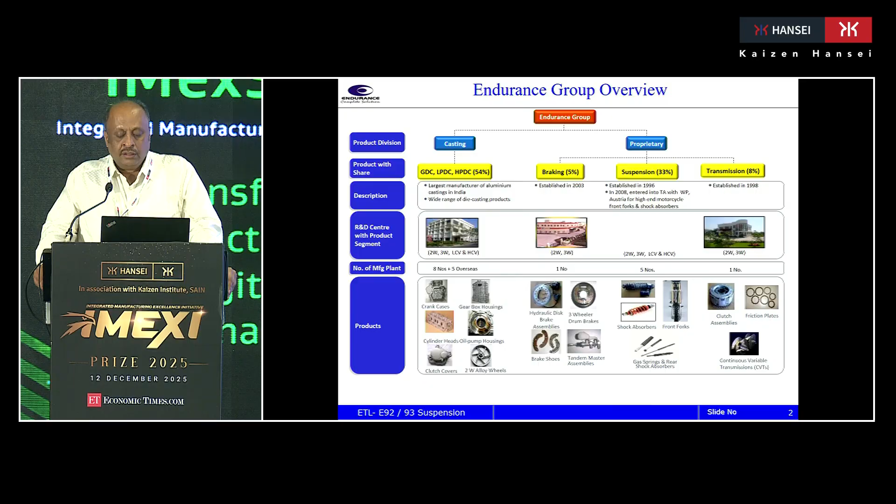Regarding our plant locations, we are in around 34 locations. In India, we have 21 manufacturing locations, 3 in Germany and 9 in Italy. Recently, we started one unit in Tunisia also.

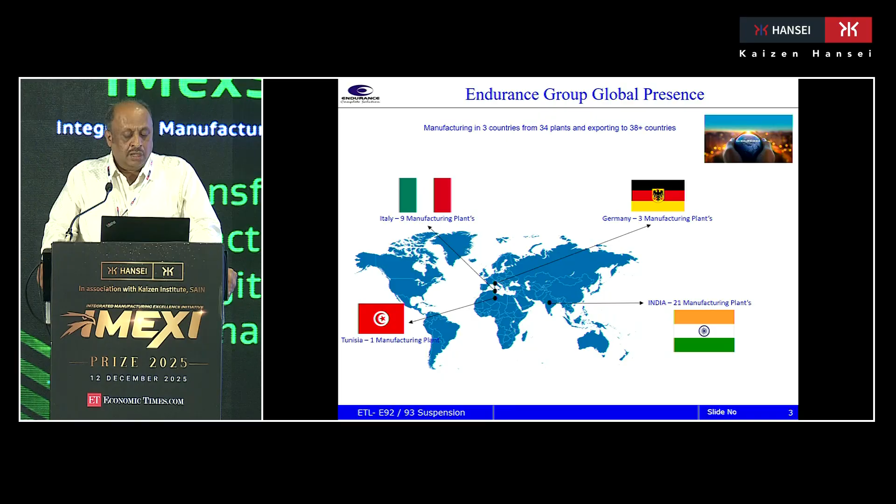Specifically, we are talking about one suspension plant. We will be presenting one case study of air suspension, a new technology in two-wheeler suspension. It is a product which was developed for the KTM 690 vehicle. Air suspension is normally used in four-wheelers, but for the first time, jointly with KTM, we started this air suspension

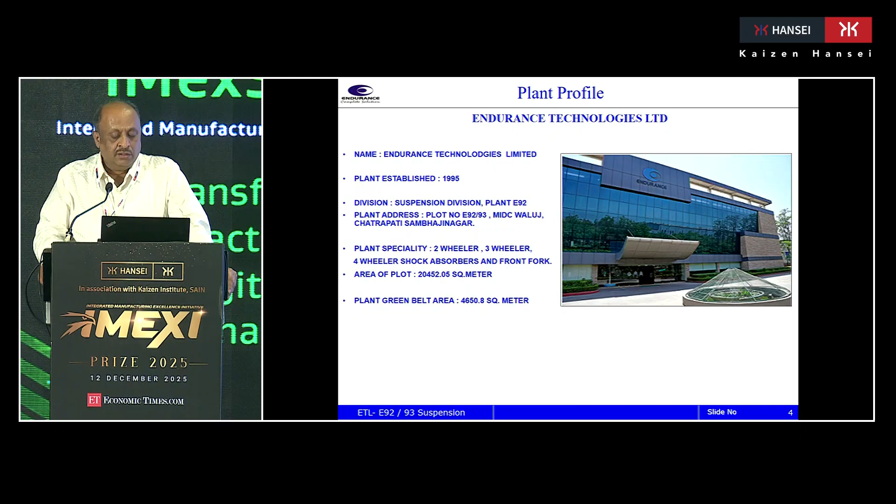We are talking about a suspension plant which was established in 1995. It is in the E92 plant location in the Waluj, Chatrapati Sambhajinagar MIDC. Here we manufacture two-, three- and four-wheeler suspension, shock absorbers and inverted front forks. It is a technological product. And we have a green belt area of around 4650.

If we talk about the Endurance values, our first value is customer centricity, because we believe if customer centricity is there, definitely we can have all the growth. Our second value is integrity, which is part of our value system. Transparency is a very important part of our system. Then teamwork, because without teamwork we cannot achieve anything. Then innovation, because through innovation we want to become the number one supplier for the OEMs.

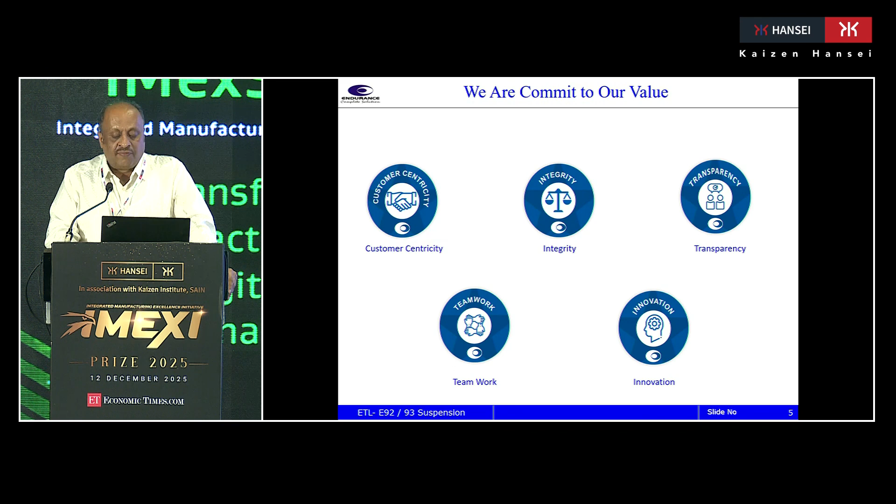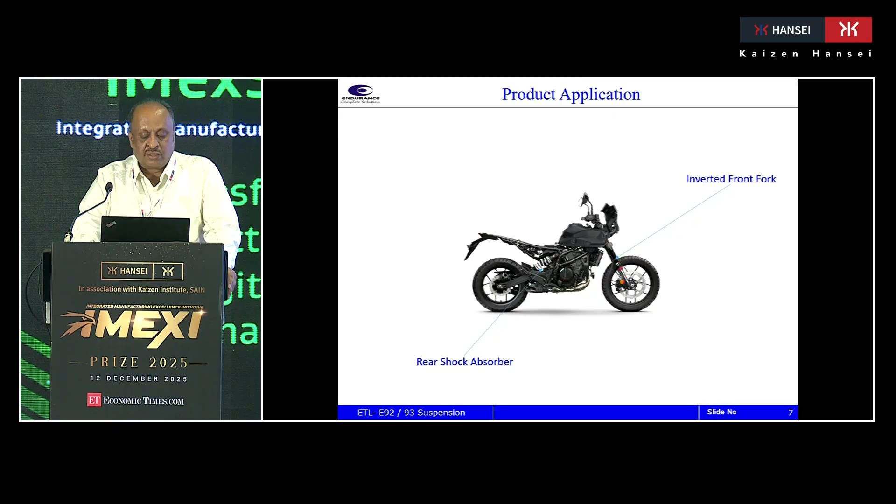Here you see the two products. This is the inverted front fork. Normally front fork means the front suspension. But compared to regular suspension, the design is different. Here the bottom case is on the upper side, so it is called an inverted front fork. And the rear suspension, we manufacture here the rear suspension for high cc vehicles.

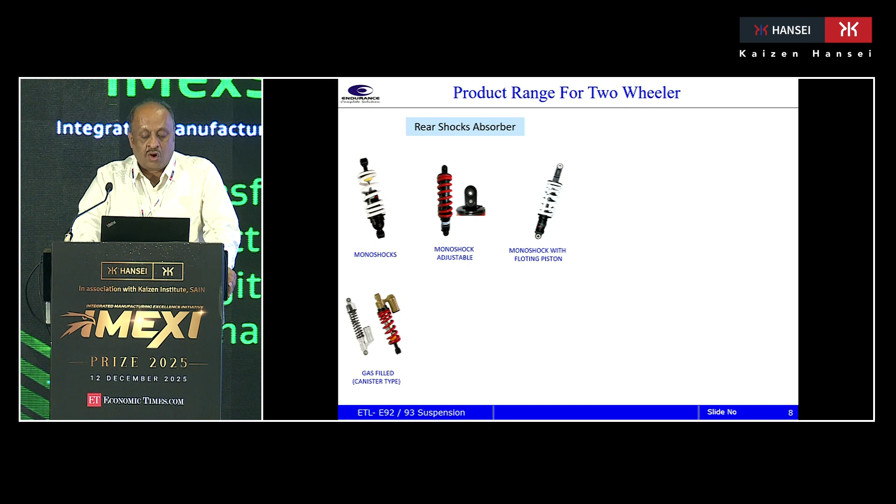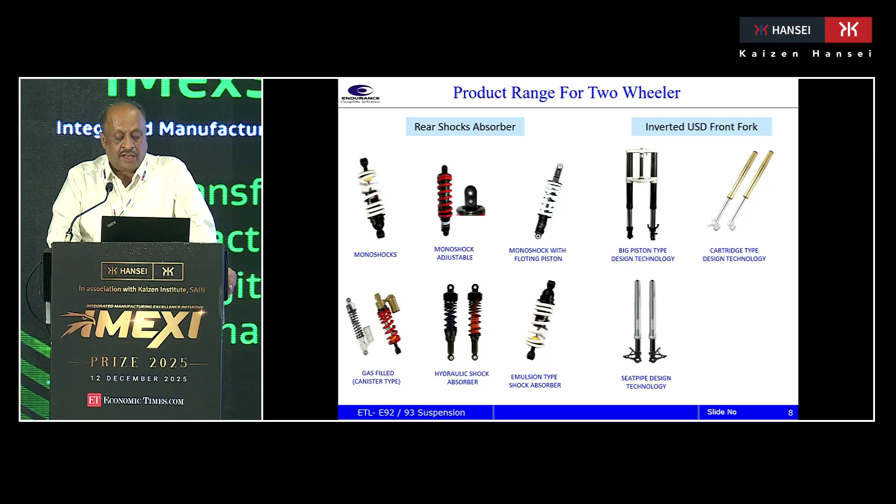You can see the product range. We are manufacturing different types of rear shock absorbers like monoshock and hydraulics. There are around 8 to 10 varieties, and the inverted USD front fork. We are the largest player in India in this inverted fork, and we are supplying to all the OEMs. There are 2-3 types of design: one is a big piston, another is a cartridge type design. These are the basic types.

Now, our motive is related to a new product and manufacturing excellence. When we started thinking of this new product, we thought we should put some manufacturing excellence ideas into it, because it is an innovation, made for the first time. Using manufacturing excellence ideas, we wanted to develop this product and start. This product has already started. We have supplied around 15,000 forks to KTM with zero defects, and it is running successfully.

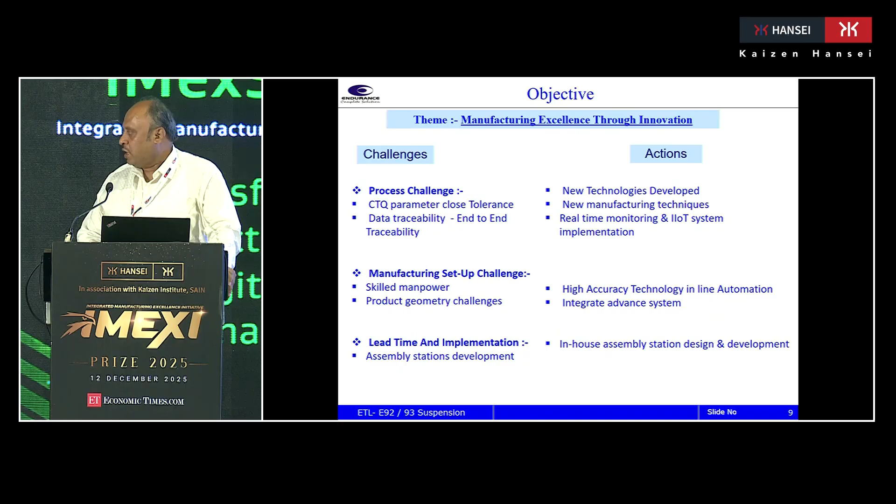Today, we are presenting regarding manufacturing excellence through innovation. This is the case study for our new product, air suspension.

So, what are the challenges we faced with the new technology suspension coming into our plant? These are challenges like process challenge, manufacturing setup challenge, and lead time or implementation challenge. In process challenge, there are two or three major challenges. These are the critical quality parameters and data traceability.

In manufacturing setup challenge: skilled manpower required and product geometry challenge, and the third one is implementation challenge, that is the assembly station development. We took over the challenges with the following actions. For the process challenge, we implemented new technology development machines in manufacturing, new manufacturing techniques, and real-time monitoring system or IIoT system implementation. For the manufacturing setup challenge, we took over the challenge by gaining high accuracy technology in automation.

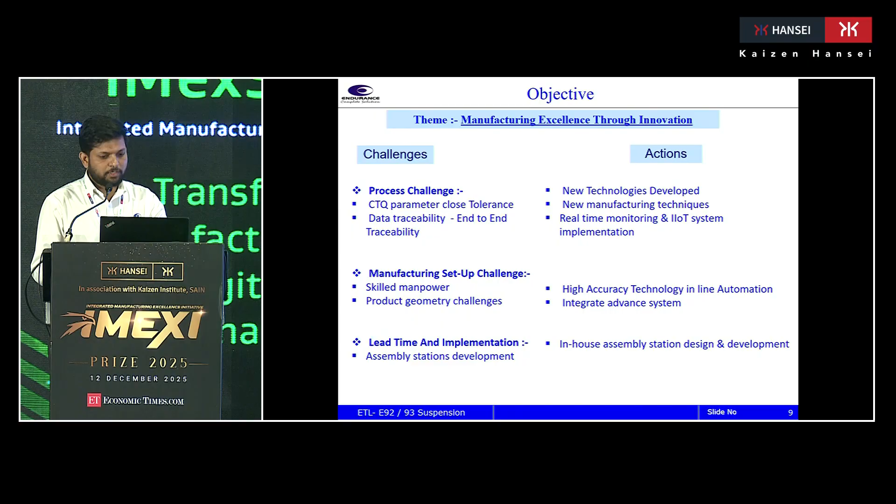Garud sir already told that air suspension is a new technology product coming in our group. For the air suspension, many processes are new for us. Some processes are key requirements from the customer. So we show in the next slide how we faced the challenge and how we took over the challenge.

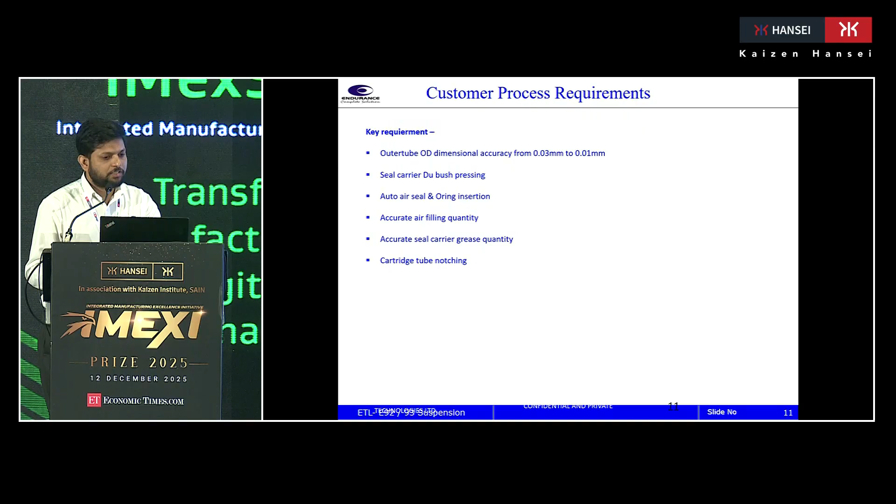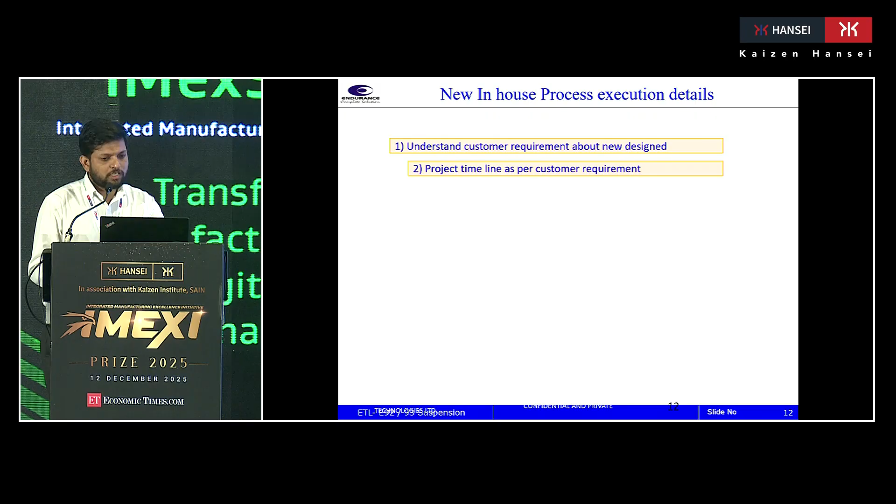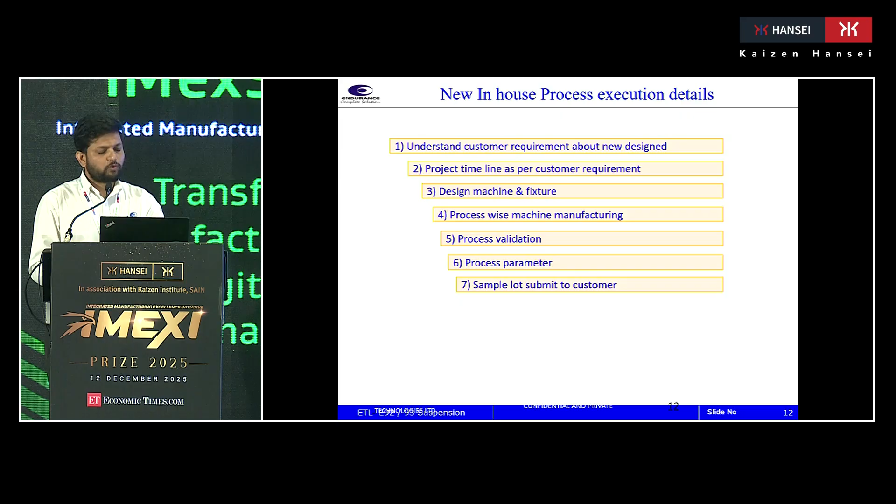For this, we have a proper plan for executing this project: understanding the customer requirement, project timeline as per customer requirement, design and machine or fixture designing, process-wise machine manufacturing, process validation, process parameters, sample lot submission to customer, customer audit, and approval for mass production or start of mass production.

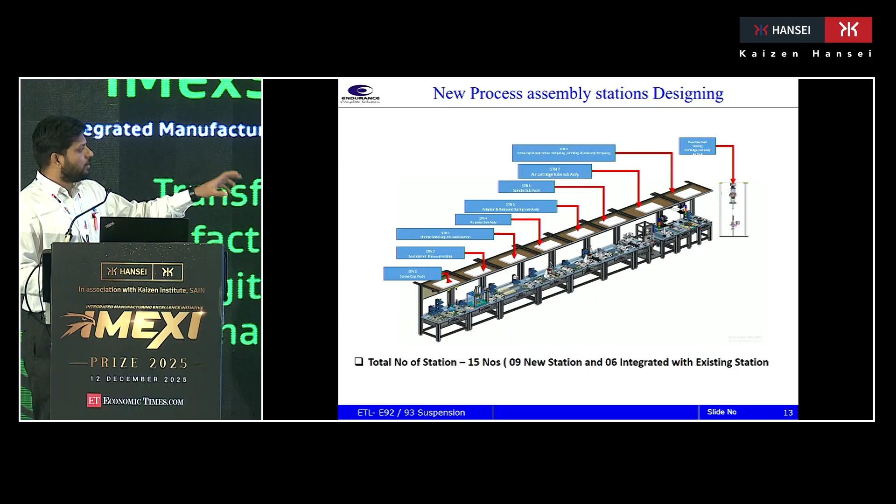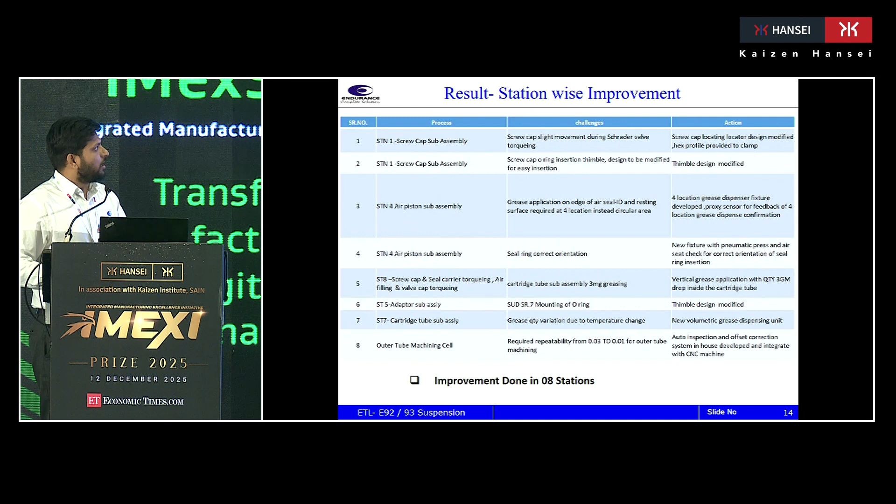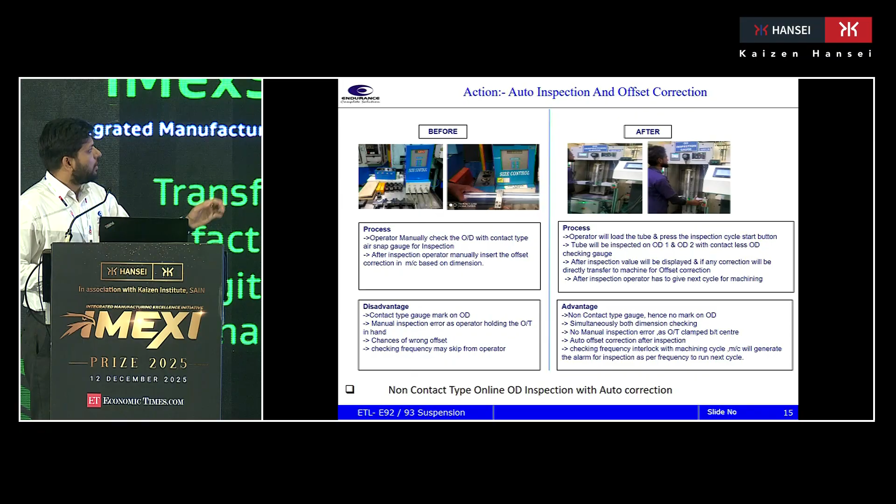This is the assembly line we developed in-house. Total 15 stations: 9 stations are new and 6 are integrated with existing stations. These are the station-wise challenges and the actions we took. One of the challenges was in the CNC machine shop. The outer tube requires closer tolerance; we already supply 30 micron tolerance tubes. For the new product, it requires 10 micron accuracy and repeatability.

In the CNC machine, a manual checking and manual feeding technique was there. We implemented a contactless type OD checking gauge interlocked with the CNC machine. So there is no need for the operator to set the program manually, and there is no checking error.

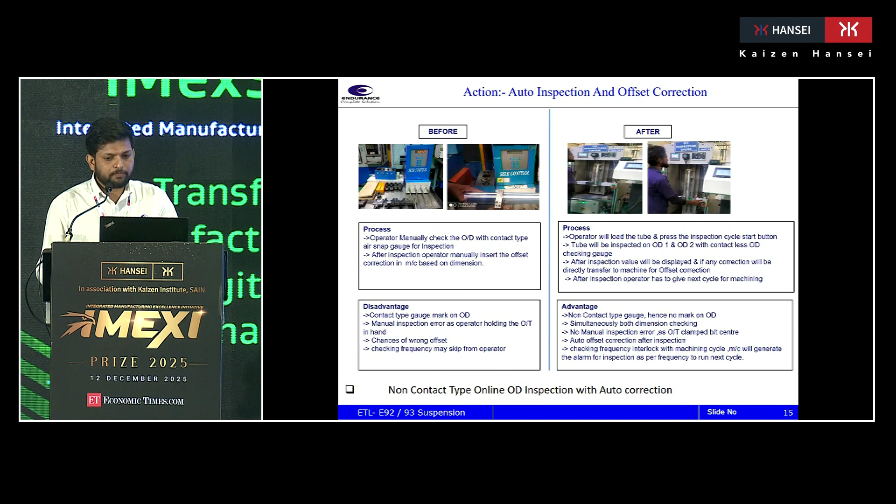Next one is the 4 location grease dispenser for tube ID greasing. This was also a challenge for us, to dispense the grease at 4 locations for the air piston. So we improved with a new accurate dispense nozzle and a 4-point indexing plate. Third one is cartridge tube ID greasing with accurate positioning. We have developed an in-house SPM for this.

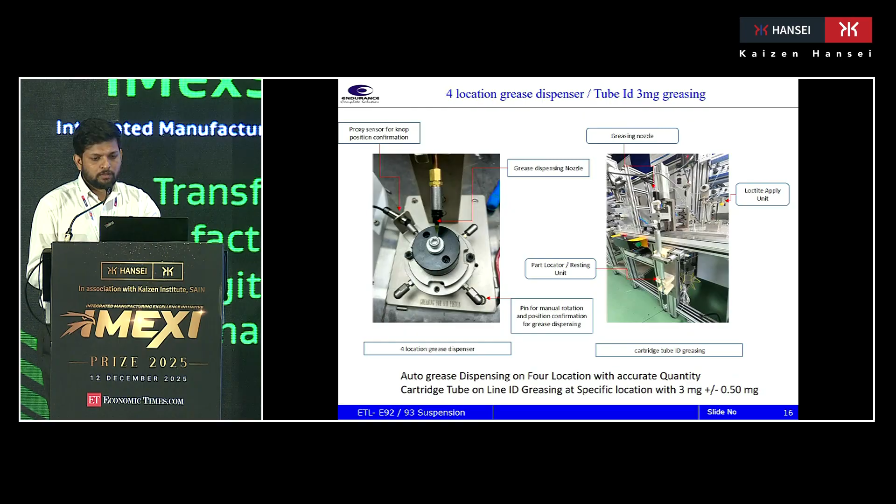And last is the air seal ring, that's called air piston orientation correction assembly. This is one more challenge for us, because the air piston looks the same on both sides, so wrong orientation pressing or assembly may be possible. We have developed an in-house pressing station to check this. It prevents fitment on the reverse side.

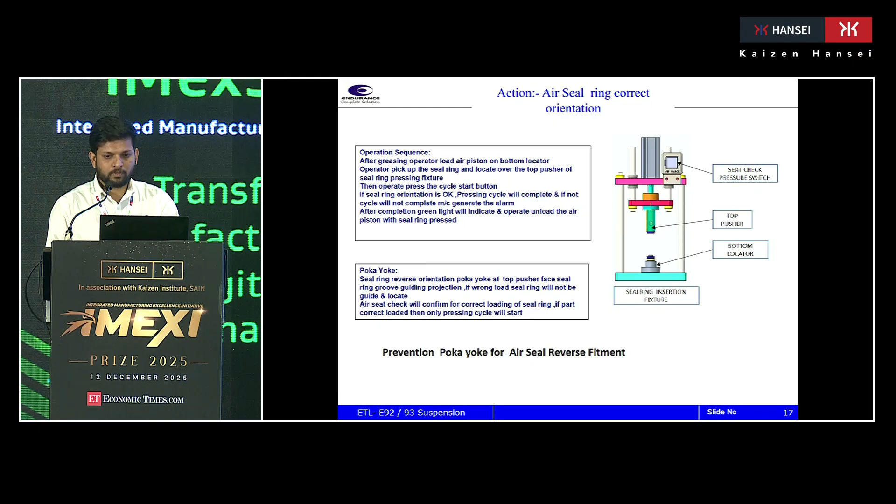Conclusion and benefits: first time USD type front fork premium product in India, two-wheeler segment; met customer vehicle build-up time within 3 months; new design air fork model added in the ETL family; met customer product requirement with first time okay; ensured 100% product and process confidentiality by building the machines in-house; implementation for error proofing to

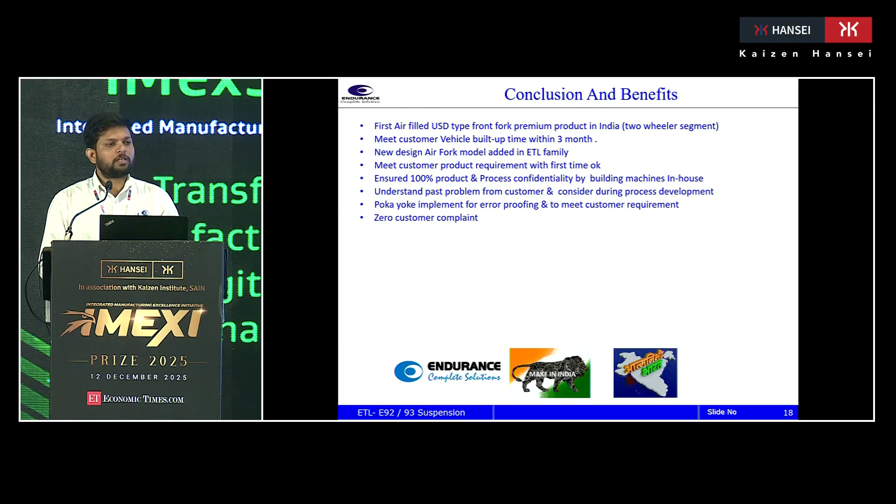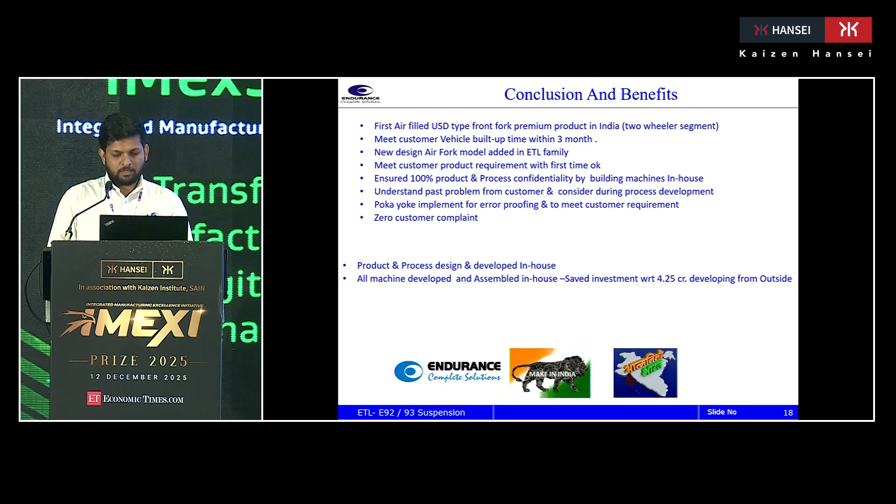meet customer requirement; zero customer complaints; product and process design and development in-house, all machines developed in-house, assembled in-house, saving 4.25 crore compared to developing from outside. We proudly share Make in India, make in Endurance product, not only the product, but also the machines. So we received appreciation from our KTM customer for the product. Thank you.